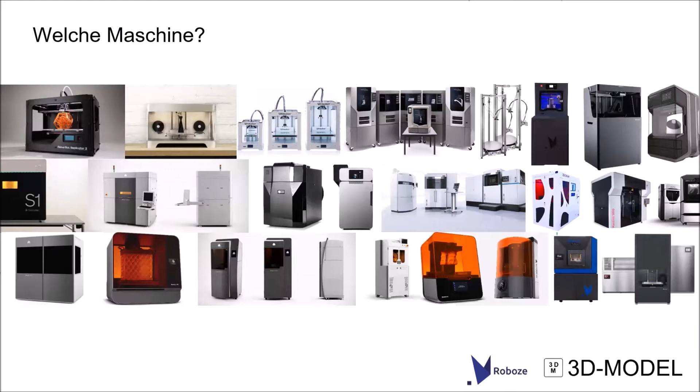Nowadays we have so many printers and printing technologies out there that it makes it very difficult to choose the right printer for me. Not only different technologies, we have a wide range of printers in different price categories, from low price segment to very high price segment.

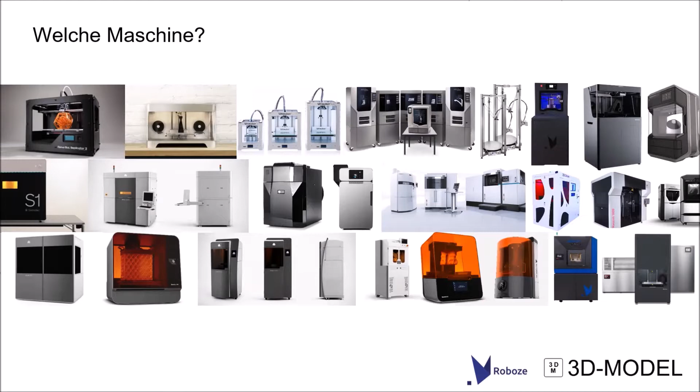Furthermore, we have printers for prototyping and for manufacturing, and to make this more complicated, we have a huge wide range of materials. Not only is there a new 3D printer coming on the market every month or two, we also have new materials coming almost every day for a printer. And as we know, not one 3D printer can print all materials.

So if we go online, if we try to read about which printer is the right one, it gets confusing. And while we're presenting what Roboze can offer you, it's important to see how do I start? How do I look for the right printer for me? What is the correct way to go about it?

Therefore, I would start by asking myself questions. What are my needs? The first question I would propose is: do I need a 3D printer for prototyping or functional prototyping, or is it for manufacturing, or both? In this sense, I have to start defining my application.

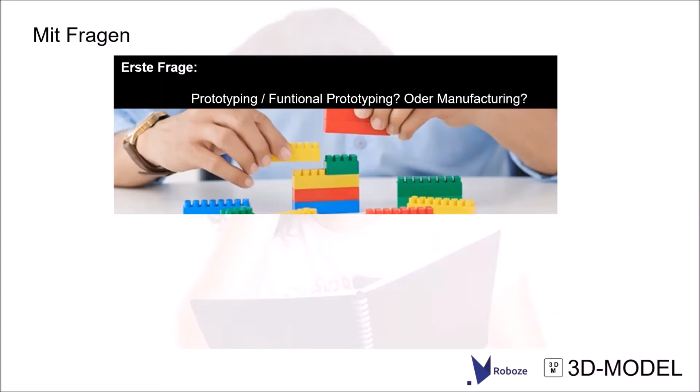Or do I need a printer for manufacturing? I want a printer that I can build parts with, build into the rest of my components, that works for a long time, that holds up — I need strong parts. So it's very important to define which application I'm looking for.

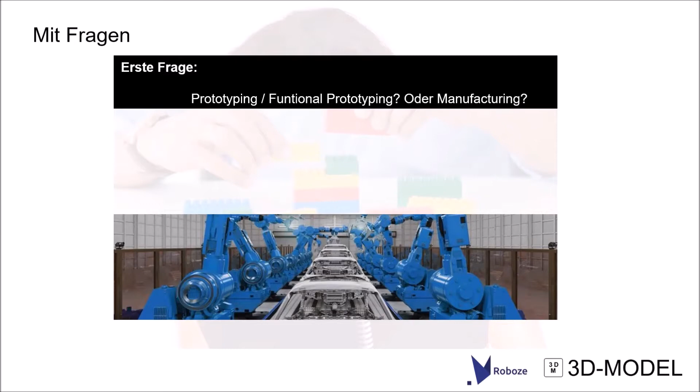The second question is material. As I said, there are many different types of materials, and that alone can get very confusing. Today we have different types of plastic — ABS, PLA, nylon. We have flexible material. We also have metal and many different types of metals, from titanium, cobalt chrome, copper, stainless steel, and furthermore, in the metal area, we also have ceramic.

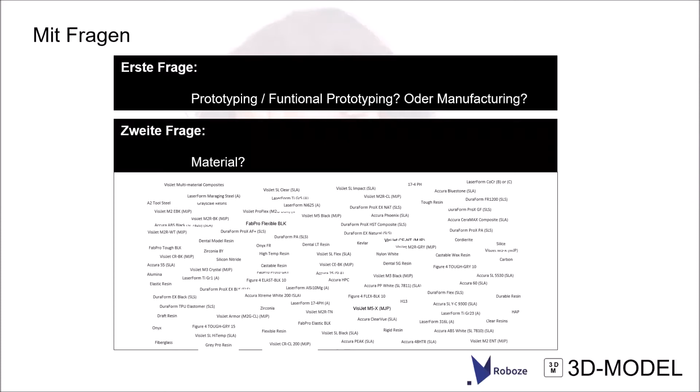So what is the correct material that I need for my application? The third question I would ask is, what build volume do I need? Do I have small parts? Do I have big parts? Or do I have many small parts?

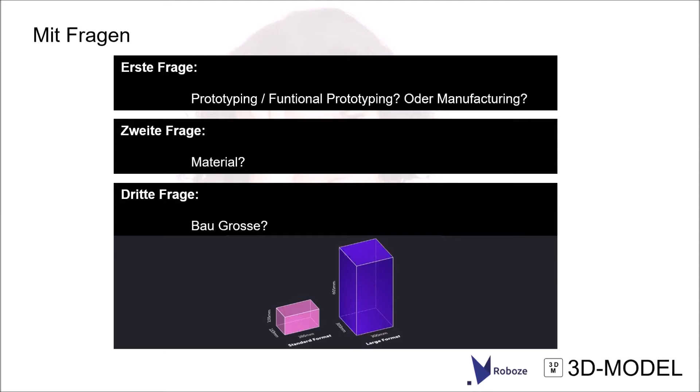Or do I have to do a lot of iterations? If my demands are just small prints with low volume, then a standard format would be enough. But if I have many iterations that I need to print at the same time, then we would go to a large format, or start thinking about building up a print farm. So I would start by asking definitely these three questions.

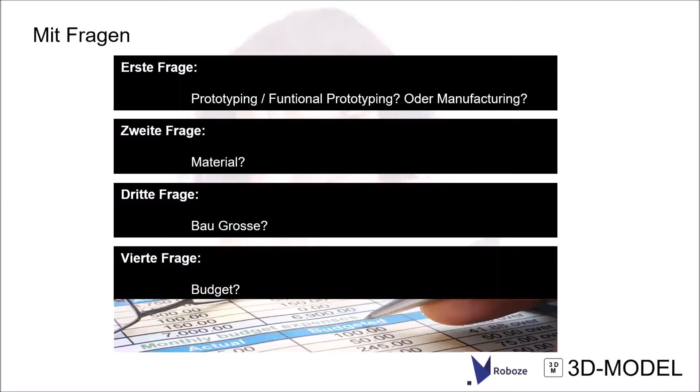And the fourth question is budget. What am I willing to invest? Am I starting off with 3D printing, or am I already an experienced user? This also comes back to the first question, again to prototyping and manufacturing. What am I willing to invest, also depending on my return on investment?

So at 3D-MODEL with our locations in Switzerland, Zurich, and in south of Germany, we have a wide range of manufacturers, printers and technologies that we can offer. Alone in prototyping and functional prototyping, we have, for example, Markforged, 3D Systems, Formlabs, and of course Roboze.

And with this wide range, we have also a wide range of materials. And of course, we definitely have a solution that fits your budget.

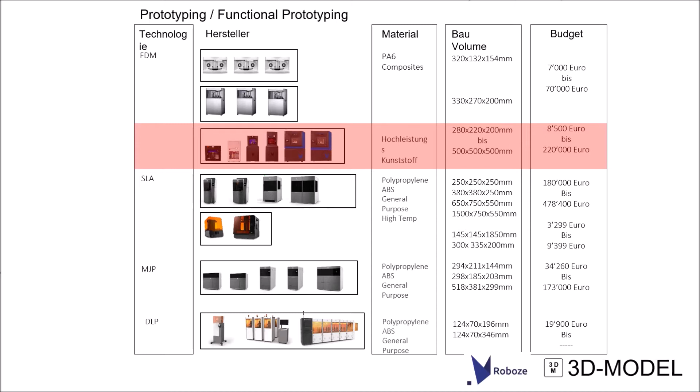And today we're going to talk about what Roboze has to offer. They have high quality, high-end material, plastic, from nylon, carbon nylon, PEEK, and carbon PEEK. So it's very interesting to see what they can offer, as well in the manufacturing, if I need end-use parts, right?

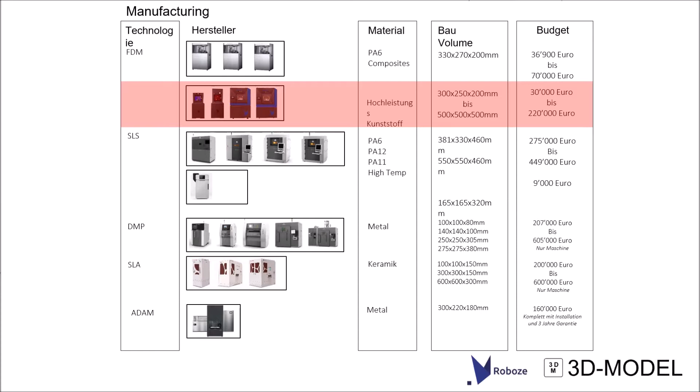It doesn't stop there. We have also solutions here, and I will highlight again the Roboze, right? We don't always need metal. We can nowadays replace, for certain applications, the metal with the high-end plastic that is most of the time easier to work with.

So I'll stop my screen, Graham, when you can stop yours. Yeah, I can hear you, Philipp. Okay, I've picked it up for me to share. So you should now see my screen. Yes, yep, okay, I will start my part of the presentation.

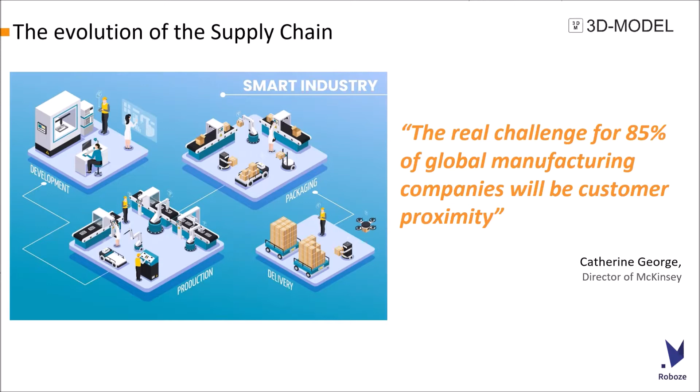So where can we help in the supply chain? We can help in many areas of the supply chain. We can help with the product itself. At Roboze, we have machines which can help you design the product and manufacture the product. That product can give you customization, or we can give you customization of the product. So it's quite unique, or limited to a few numbers of machines or products that we're going to do, up to many products that we can do.

We can integrate the functionalities and make things much more efficient than they've been in the past. And of course, we can respond very, very quickly to the market needs. So as the market changes, having 3D printers allows you to respond to those needs.

Then in the production side, we can do mass customization. So rather than someone making a product and they've got to keep it in production for a long time, or keep the production the same to make it cost effective, we can help by making mass customization and making it easier and a more unique product for your customers.

Then if we look on to the warehouse and the distribution, warehouse costs a great deal of money today, and that warehouse is tied up with stock. We can reduce the lead time so that you don't only have that stock, but you can actually get a product in a more efficient manner than having it stored maybe on site or quite a distance from your site. So we can certainly help with the distribution costs.

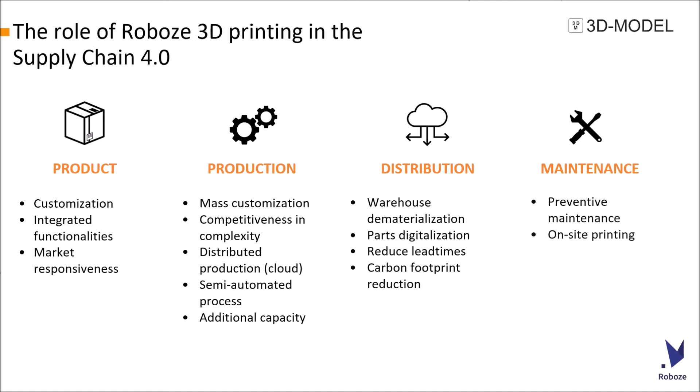And then of course, there's maintenance. If you have a factory and you've got a production line going, you may want to have printers that can produce parts as you need them. So those parts could be used in the production process, or there could be special tools that you use in the production space. This is becoming more and more important if you're in aerospace, automotive, and other large factories where you can respond to the needs that you need locally rather than sending out for something. So it's certainly a big consideration, the maintenance.

We go on to the next slide and we look at the profit with innovation focus. So you can innovate and profit from that innovation. You're not being restricted with what you've already got or what you would like to put into production, but you need large numbers. So innovation is a great thing, and it can certainly keep you ahead of your competition, and keep you at the forefront of your technology.

As we said earlier, mass customization: the market is moving away from the need for one part which is going to last forever. People constantly want to make improvements.

People want to advance their products, and you can do this with mass customization, albeit relatively low numbers of production. But of course, if you scale that over a number of years or months, you're going to get more and more production. This is going to help you, and you get less choice and more customization.

Reduce the cost of the warehouse and the logistics, very important. We're all trying to save fuel these days, trying to save emissions. And of course, if you don't have to transport to a warehouse, then from a warehouse, that saves in these costs as well.

And reduce the time to market. As we said, if you can innovate and make your technology or products a way ahead of the competition, you will have a market lead on them. That's very important, so reduced time to market is becoming less and less. If you look at cars nowadays, they're produced in a relatively short time scale, and that time scale may be updating them on a regular basis, rather than producing a car and having it there for 4 or 5 years because your costs are tied up on it. That is not the way to do it.

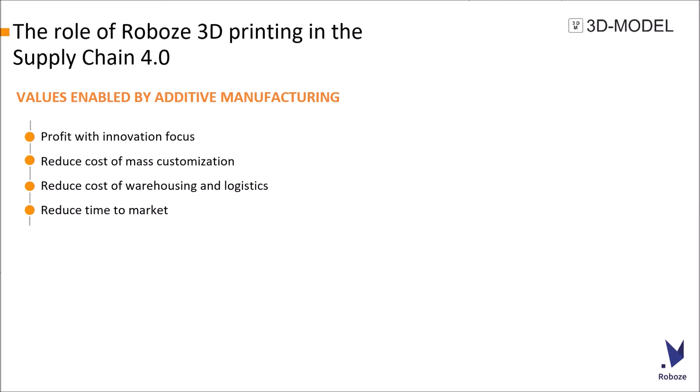If we do a quick comparison between traditional manufacturing and additive manufacturing: traditional manufacturing, which has been around for many years now, is focused on mass production. Long production runs, keep things in production as long as possible, because that's where you're going to make your money. The aesthetics are the same. The economies of scale are geared to make many, many products and not necessarily upgrade those products, or only with limited upgrades.

With additive manufacturing, it's the total opposite. Your speed to market is much, much less. You can innovate and make new products and customize products in a very short space of time. You can also make sure, as we said before, that you're leading the market that you're in. So that helps your company, helps your costs.

Complexity for free. You can make parts very, very complex. Parts that you would normally manufacture in several pieces and put into an assembly, you may be able to print as one piece. And that complexity is there with 3D printers. You can print those complex parts.

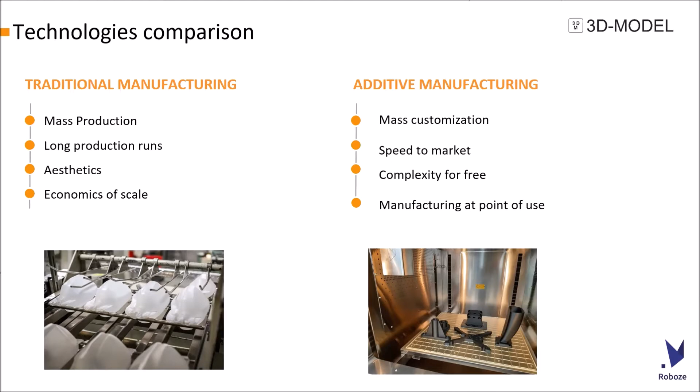That means less stocking of parts, and it also means that you can advance technology very quickly and take advantage of it. And manufacturing, of course, at the point of use. So that saves logistics. If you can manufacture where you need it, rather than bringing in lots of components or parts from different parts of the world, manufacturing at the point of use is another time-saving and cost-saving effect.

So if you're making something that's maybe, say, 250 parts, 500 parts, those parts become very expensive. And as we said earlier, what we're trying to do is drive that down, and with traditional manufacturing, you push that out to tens of thousands of parts to make it cost effective.

3D printing is different. Whether you produce one part, 1,000 parts, or 10,000 parts, your costs are going to be fixed, because your material cost is fixed and your time is fixed. So it's much more flexible in your manufacturing process to have 3D printers, rather than gear yourself up to make many, many parts which are only going to be the same.

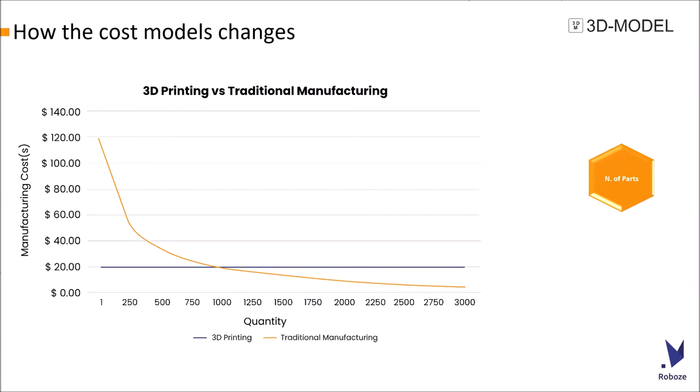Halfway through this cycle of maybe 1,000 or 1,500 parts, if we wanted to incorporate changes, it's very easy to do that with 3D printing. With traditional manufacturing, your costs escalate again, and then you've got to write that off over a long period of time again.

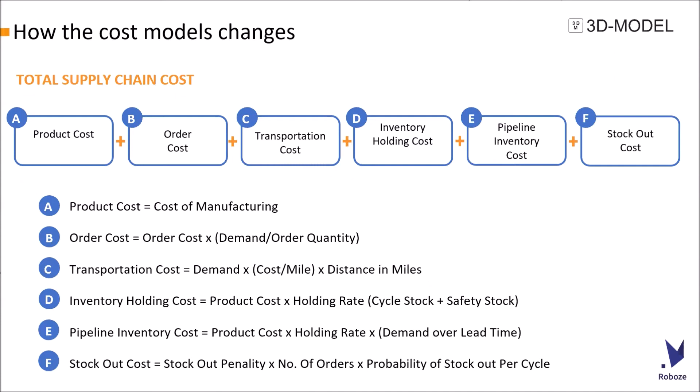On our products, PEEK is a very tough material. It's got a high, strong resistance to high temperatures. It's got a strong resistance to chemicals. So it's used for the product, or it could be used for jigs, tools, fixtures, making the products that you need.

If you look at it on a CNC machine, you could do preparation for 1 hour, 3 hours for production, and it's 3 hours to do it on a printer. So you've saved 25% straight away. If you look at the costs...

Traditional manufacturing takes a block of material and machines that away with a high amount of waste. There is a lot of waste. With printing, you only use the parts that you need. You use the material to print in the areas that you need.

Another saving in cost: setting up a 3D printer is very easy. So the FTE time needed to set up a printer is very, very simple. It's automated. We automatically feed the material into the machine. We automatically set the build plates these days. Everything is very much more automated than it's been in the past. With CNC, they're still doing the same process they have done forever.

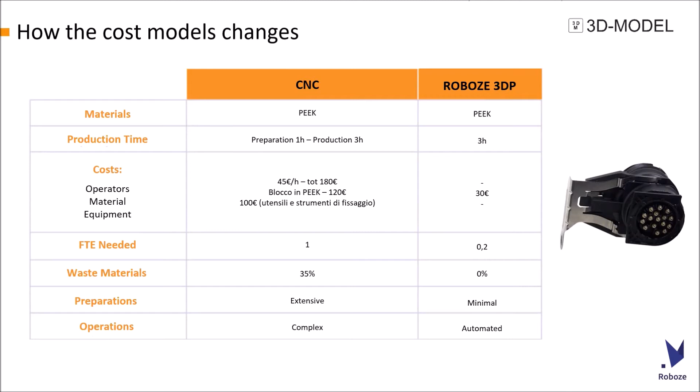And then there's the amount of waste materials. As we said earlier, if you're machining away, subtractive manufacturing, that gives you a high amount of waste. That's not the case with 3D printing. With 3D printing, almost everything is what you need to be printed with. So you can see here, there are big savings to use 3D printers, particularly 3D printers which have materials that are very functional and usable for the applications that you need.

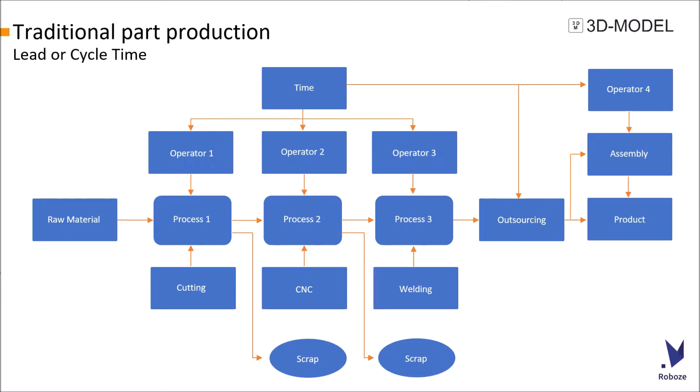This is a typical part in production. If you imagine you have several operators and they're all doing different processes - you could be cutting the parts, cutting material, CNCing them, welding them, bringing things together. Those are manually or skilled jobs in some cases, but they're very, very labor intensive. Even today in manufacturing, with robotics, we're still getting fairly labor intensive in some parts of that process of making something.

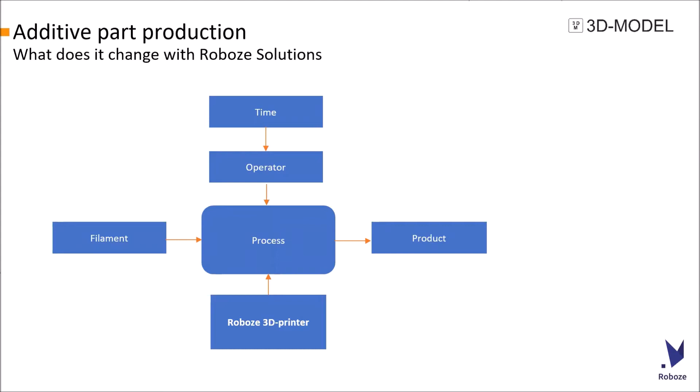It is much easier if you do it with additive manufacturing. You have an operator, you have a filament that goes into the process, you have the 3D printer that's part of the process, and you have a final product. Much, much simpler, much easier, and reduces your costs significantly.

If we look at some of the departments or ways that 3D printing can help - if you have departments, you have cost and time reduction within those departments, you have less outsourcing to do, you have more control over your own supply chain rather than relying on others to deliver components or product to you. You're less dependent on other people's schedule. If someone has an urgent job, your job may slip slightly, then you're waiting for something to come in to help you with production.

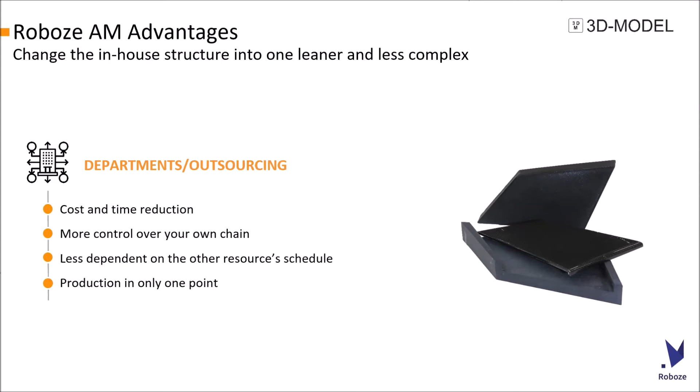And of course, production is only one point. You're doing that on your 3D printer. Because you're using your 3D printer and printing with your 3D printer, you have brought all those into the one location. Time costs money, there is no doubt about it. Time and money go together. If you can reduce the time, you will save money.

There is less chance of human error if it's an automated system. Human error costs time and can be very, very expensive. You can have productivity which continues even when no one is in the office. Your printer can be working away day and night.

You load it up to do the parts that you want to do, and as you load it up to do those parts, you walk away and you leave it. The printers are reliable. They allow you to carry on with your other things that's got to be done. And when it's finished, you go along and pick up the parts that you require.

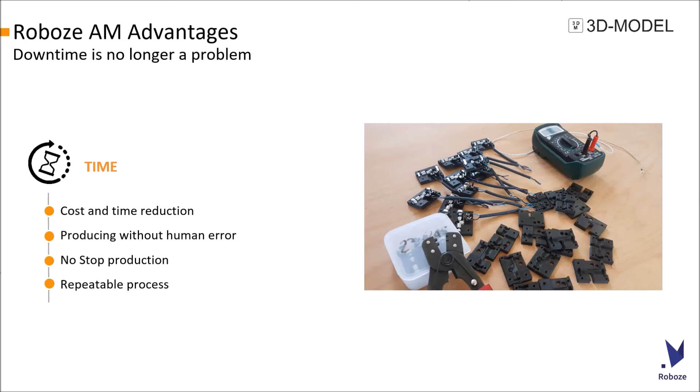It's a repeatable process. If you change the design that you're working with and you're trying to do something slightly different, it's still the same process for the printer. The printer will take the data, produce the part, and you have a part at the end. So if you've modified your design, that's okay, because it makes no big difference to the printer whatsoever.

Waste reduction - in the world, we do waste a lot of material. We waste a lot of material that maybe we should not do so. We are quite a wasteful society, I've got to confess.

But if we can cut down on that material, that is great. Because instead of doing subtractive manufacturing where there can be a high volume of waste, if you do additive, you're only using the material you really need. So that can be significant. I have seen parts where 80% was waste because it was a relatively small or thin part that was needed, meaning 80% of what they were machining went straight into the bin or had to be recycled, which also costs money.

Parts can be lighter. With some of the technologies and materials we have today, we can produce parts which are as strong as metal. Phil referred to this in his earlier presentation, and it's very true. You have parts which are lighter, which means that if it's fitted to some transport system, whether automotive or aerospace, it reduces the weight of that vehicle or aircraft. That saves emissions, and that helps save the environment.

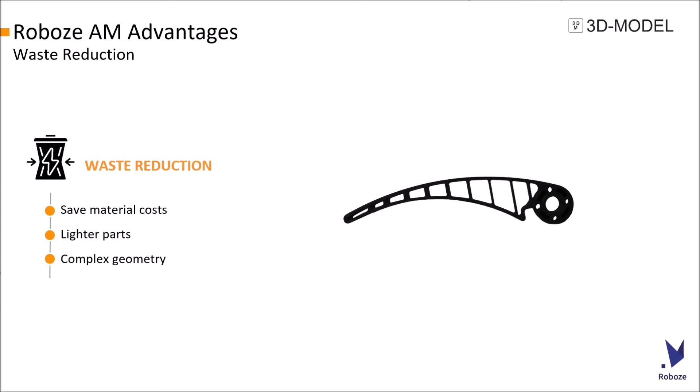This saves a lot of time in your manufacturing process, and this is not an exceptional case - it can be fairly standard, reducing time and effort by making parts into a single piece as opposed to something that needs to be assembled. This does mean you need to look at 3D printing slightly differently than you've done in the past, but we're all there to help you get that and make the efficiencies in what you're trying to do.

Human resource optimization: you can have a lean number of people, a production chain which is much leaner and needs fewer people in it. This leads to a reduction in the human resources you need. That doesn't mean everyone has gone - it means people could be doing something different than standing next to a machine.

3D printing is reliable enough and doesn't need adjustment in the process. You start the printer, you come back at the end. You don't have to keep an eye on what's happening within the printer or watch it and make adjustments as you go. Basically, you load up the job, you start it, you leave it, and meantime you can be doing other things - modifying designs, preparing for the next jobs, scheduling. There's so much more that can be done rather than watching a machine.

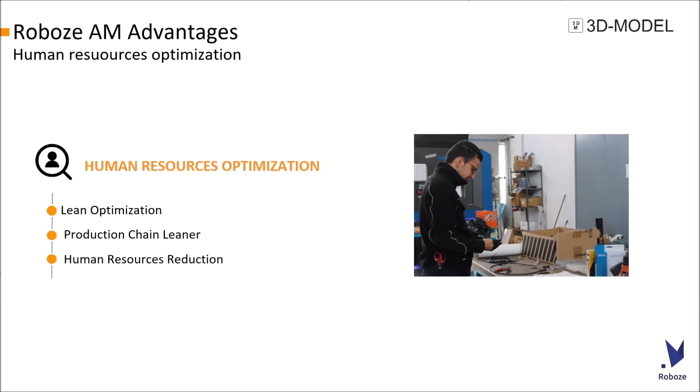Then assembly - you're eliminating the complexity, making it easy to assemble. We have parts which can be used very effectively in part holding to make this assembly accurate. If you imagine having some metal parts that had to be joined together accurately, or with a bit of heat involved to make sure the parts bond, we can provide materials that allow you to do that. This helps in the accuracy of your assembly, and in customizing tools which fit exactly what you need. You don't always have to use standard products - you can use products that are very customized to your needs, and that's very important. That gives you control and the ability to make things unique for yourself rather than buying something off the shelf.

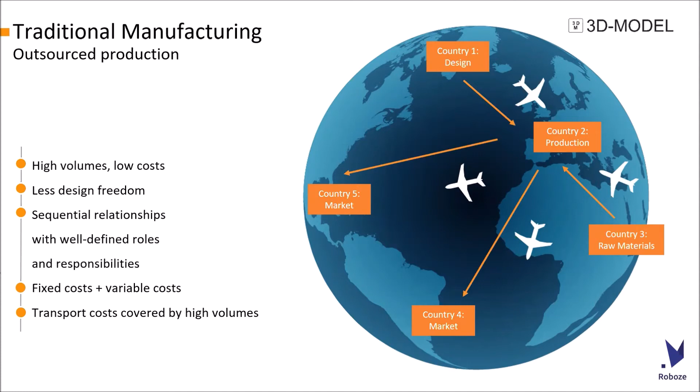With traditional manufacturing, as we know, we are shipping things all over the world. Many countries are involved, providing parts of the components we need - high volumes, low cost, this is what we go back to. So they're shipping it all over the place, and it's not always the most cost-effective way to do it. Transport costs are high and keep rising, and we need to think a bit more about how we do this. If something happens and you're waiting for components from across the world and something goes wrong with just one of those components, you're going to hold back your production. If you cannot get output, you cannot invoice, you cannot get the assembly going. So we very much need to try and reduce some of this travel, not just for ourselves, but for the emissions as well, for the world - let's try and make the world a healthier place to be, should I say.

With additive manufacturing, the design could be produced in one country. The design is easy to transport to another country because, for example, in Germany, if you are making some design for cars, aerospace, machinery, whatever, those data files, those software, the CAD software, the files from there can very easily be sent to another part of the country or another country. It's very, very easy to do that.

We have the cloud and we send it via cloud nowadays or some other method. So we're not using transport systems, we're using the internet system to do that.

The raw materials could come from another country as well, and we send in raw materials. Those raw materials could be filaments, and those are fairly easy to ship, very easy to ship to be honest. You could ship those in, all coming into one to make the product.

And it doesn't matter whether it's across a country or whether it's within a single country. Both can be much more efficient than what we're used to in the past. The costs are fixed and it's easier for us to keep control of the customer and the manufacturer. It's much, much easier to do that than it coming from many, many different sources across the world.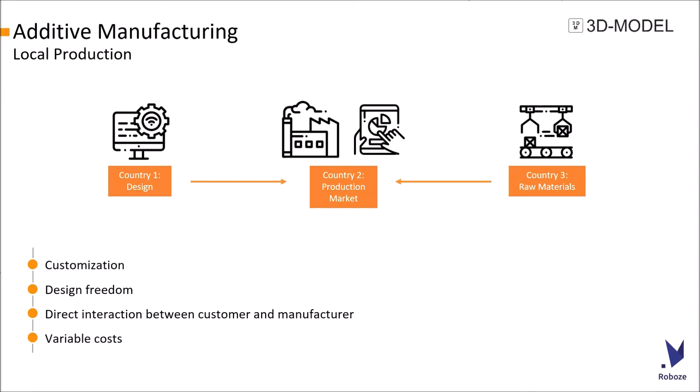Here's a typical case study. The Iveco trucks, a customer that we have down in Italy, in our home country, that you see on the right-hand side, there's a sliding stopper made in PEEK. PEEK is a strong enough material that can be used as a produced part. It can be used in situ in this truck. So when the door slides, that is a stopper there for the door.

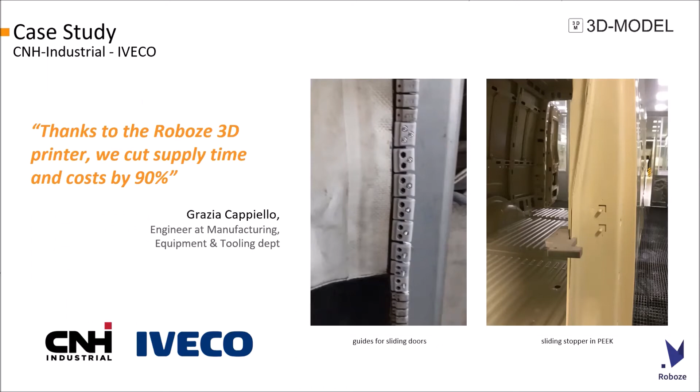This has saved them a time of about 90% in supply time and costs, a significant difference with just one single part. After they did this, they then looked at other parts of where they could save money and where they could save time with the production, and that increased everything a great deal. It doesn't mean we're producing the whole vehicle, but we're contributing to make the vehicle in a very significant way. And all those little times that we save with components all build up, of course, and make it much, much more efficient.

A PEEK valve for an oil and gas sector. This is a valve that's used within the oil and gas sector. Sorry about the phone, just give me 1 second.

Apologise for that, I've just disconnected it.

So this is a component that's needed, fairly common in the oil and gas sectors. There is a lot of waste and a lot of money in the oil and gas sector. You know, if you stop production, whether it be in a car factory or whether it be in oil and gas, it costs you an awful lot of money.

The time to produce this part was about 4 hours. And as I said, we have materials that can be used to make parts which have excellent chemical resistance. This is what they required. This would be a specialist part. And this part, if they had to wait for someone to manufacture it, it would cost a lot in time.

They've got to wait for it to come in-house. Equally, if they have a warehouse full of those and many, many parts in stock, it's costing them money. We could produce this part in a few hours, and this is a real functional part that they can use in the day-to-day life of producing oil and gas.

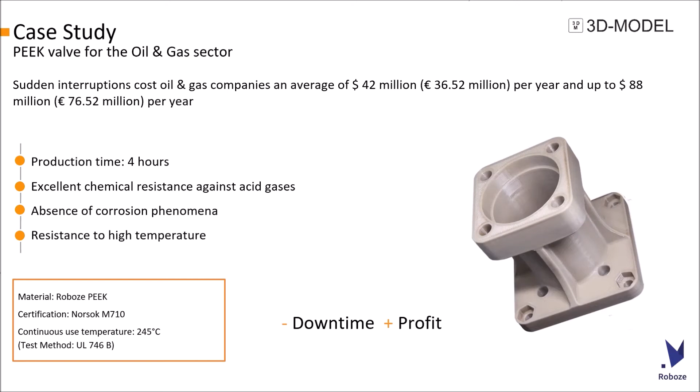Warehouses - we drive down the motorways these days, or the Autobahn, and there are many warehouses, not just holding final product, but also holding parts for people. These warehouses cost a lot of money, and also it's stock - this stock costs a lot of money. It ties up your cash.

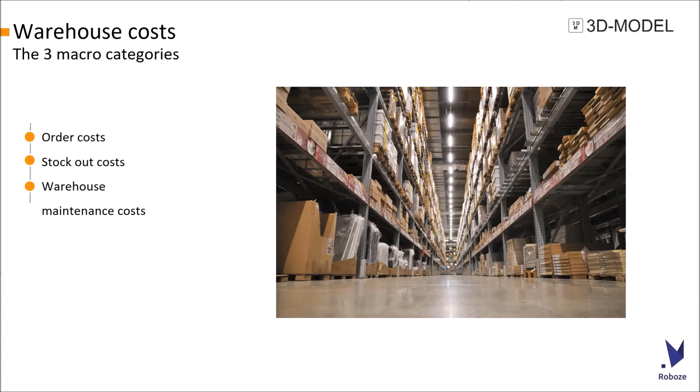Why not print it when you need it rather than having a warehouse full of parts? You still have the same problem with a warehouse in that you may be hundreds of kilometers from that warehouse and they've got to transport it to you. Why not have a printer close to where it's needed and print the part as you need it? Or if you have routine or scheduled maintenance, print those parts before you start, and those can be in your office right next to where they're required.

Warehouse costs, we've already touched a little bit on: capital costs, storage costs, service costs, risk costs. If you have a warehouse full of components, you're very reluctant to change your design because you're going to have to write that cost off, or part of it. You don't want to change a design and then have to get rid of components sitting there as dead stock. Basically, the warehouse is going to cost you a lot of money.

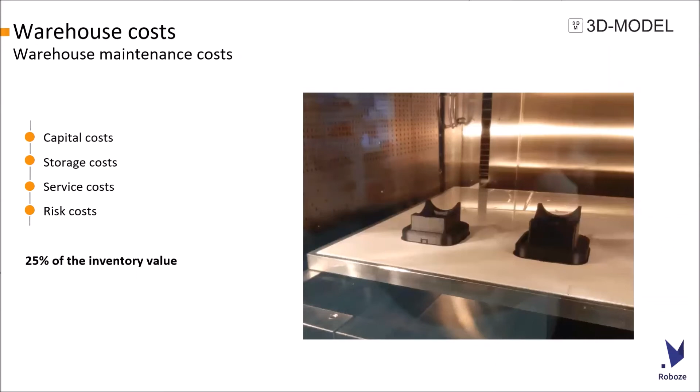If we look at this slide, we see there's a physical warehouse for mass production. As we said earlier, we're producing many components and then stocking them. With just-in-time manufacturing, it's a similar process - you're trying to get them into the car factory just in time, but there is still a large stock because you cannot afford for that to go down, or to not be supplying your customers. Stocks always exceed your needs because you need a buffer. This obviously increases delivery times as well.

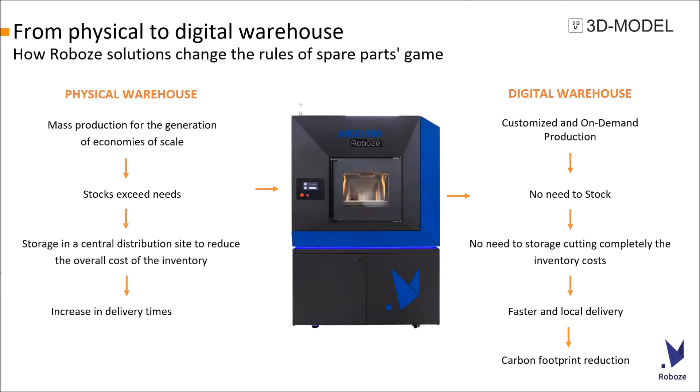With a digital warehouse, you have all the data online, available for you when you need it. So you're not overproducing parts, and you're taking stock only from when you need the parts. This becomes much more cost effective and more reliable than in the past. You don't have the big inventory costs you've had before. And of course, you're delivering the parts right to where you need them, which is at your office. And as we keep talking about, it does reduce your carbon footprint - a good thing going forward, as we all try to save and reduce it.

If we look here at how to optimize warehouse costs: you have a spare parts catalogue or product catalogue, and you can decide which parts move slowly and which move quickly. Here's a part you very seldom need - you do not want to stock that part, you want to produce it as you need it. Even for a slow or very slow component, don't tie up many of them on the shelf costing money to stock. Have those components produced as you need them.

We don't do everything this way - there are some parts needed constantly, maybe on an hourly or daily basis, and yes, those can still be done with traditional manufacturing. The whole idea is to have the parts when you need them, as you need them, and save on the long drawn out way of producing and stocking parts.

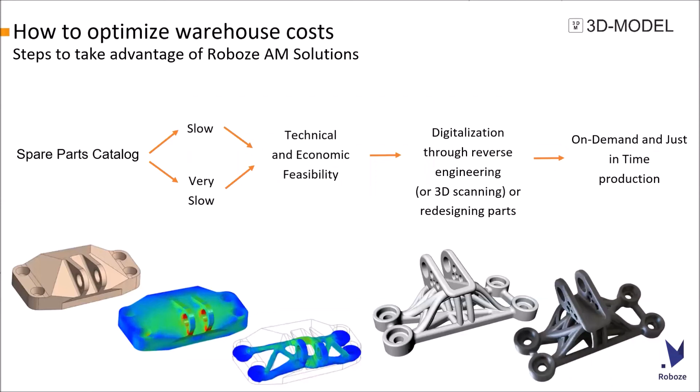So what can Roboze do to help you with your 3D printing? We have a wide range of materials, a wide range of machines, and a service called 3D Parts, which is like an on-demand, just-in-time production site. This is done with a network of companies we deal with across the world. Basically, it's another way to get into 3D printing to prove it's right for you - close to where you are, closer than shipping across the world, giving you a taste of what can be done.

Our printers themselves, as you've seen on Phil's chart, range from low-cost printers right up to full production printers - desktop printers to production range. So we have a wide range of printers that we can help analyze what you need. That's part of Phil's job, my job - all of our job is to analyze what you need so we get the right solution for you.

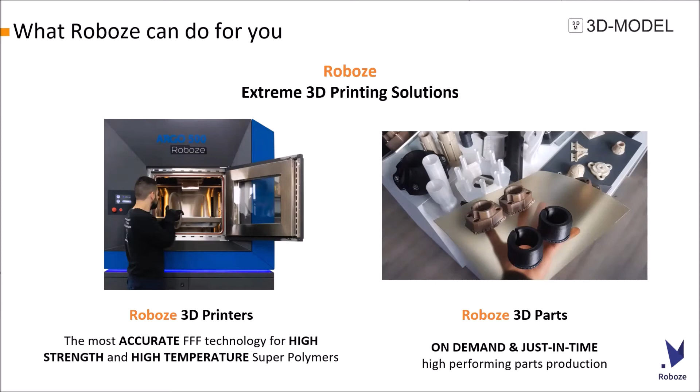Looking quickly at Roboze 3D printers: faster production than traditional methods, you get it on demand, when you need it. One-step production - there isn't a number of people or operators producing the parts, you can have one person operate the machine and control it. Reduction of material costs - you're saving material, not making stock, and not doing subtractive manufacturing with a high amount of waste, so your reduction in material costs is significant.

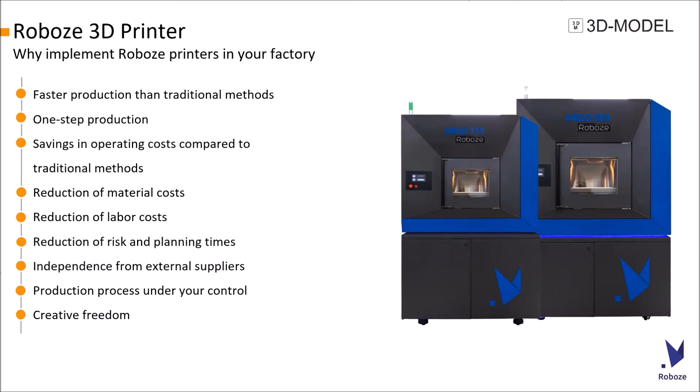Reduction in labor costs, reduction in risk and planning times - you get the components and parts when you need them, you're not relying on someone else, you have control. Your dependence on external suppliers is reduced, since you do this in-house. And of course, creative freedom - freedom to make parts as you need them, freedom to modify, update and enhance your products and technology as you go forward. So very much we are giving you something that makes sure 3D printers are an ideal fit for you.

3D parts is a flexible manufacturing system of high performance parts. We use materials which are high performing - it's what Roboze is known for. They're known for producing parts or materials which are very unique and strong, whether that be for high temperature applications, high strength applications, or high chemical resistant applications - we have them all. Roboze 3D parts can give you a flavor into that. You can use them to buy some of those parts, to try and test them for yourself, and then work up to a reasonable sense of what you need for your production.

Do you need a large machine, small machine, big platform, small platform? You can find all that out by using us to produce some parts. That is not a problem.

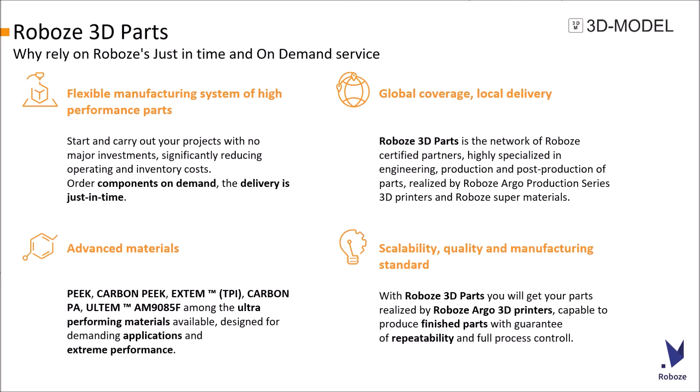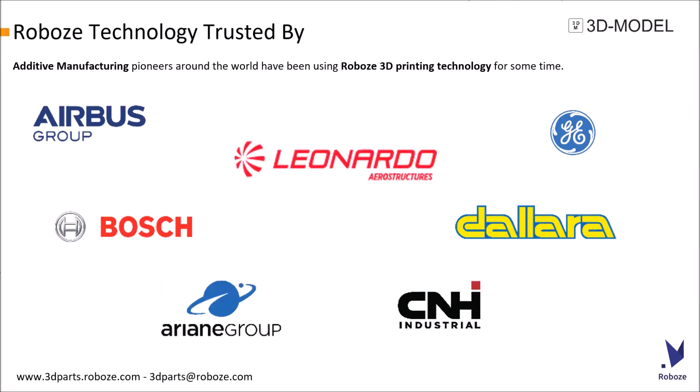Some of the customers we have already sold machines to and are using our machines - this is just a small amount of the people that we have. There are many well-known customers from across the world that we deal with. For each well-known customer, there are many unknown customers who supply those companies as well. Airbus doesn't do everything - Airbus uses many suppliers to print parts for them. We have the companies that provide the parts to Airbus.

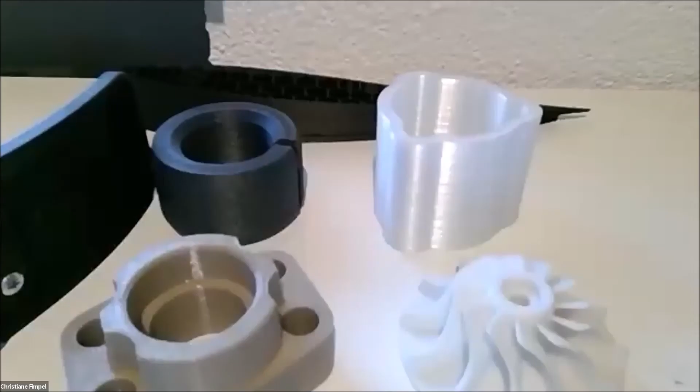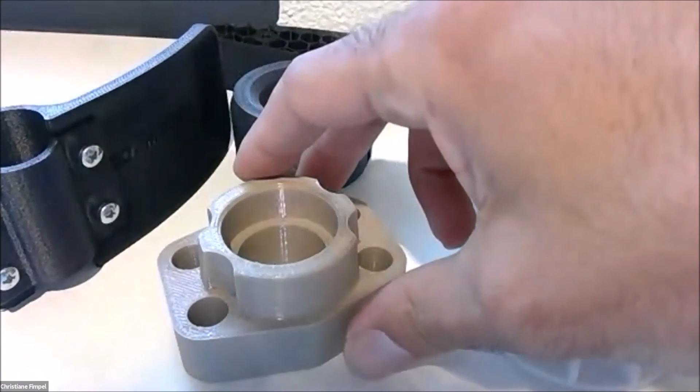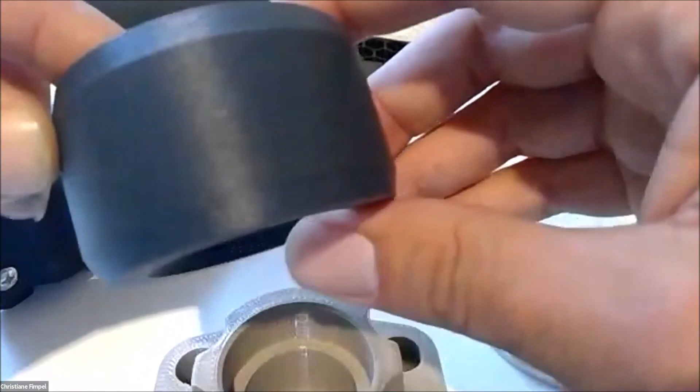This is now a part, also a valve, that is printed in PEEK material. What is also interesting from the Roboze side is they not only have pure PEEK as we've seen here, but also a carbon PEEK material. It's a very, very strong material - I would say as strong as metal. Even if I try to close the gap here, it's very tough, I can hardly budge it.

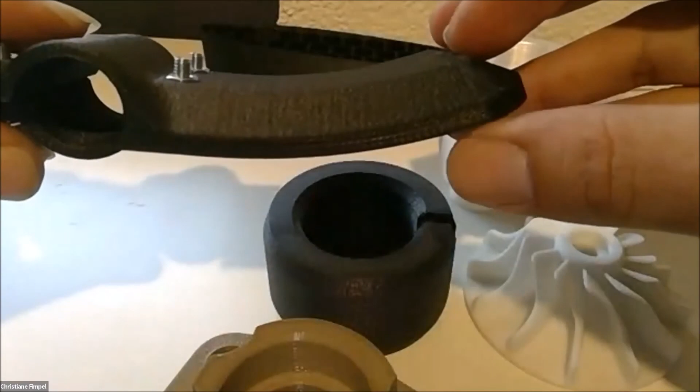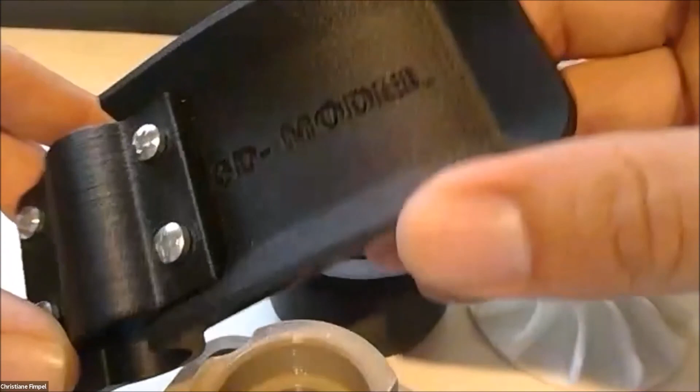3D Model, we've also been doing our part for COVID-19. We've been developing handles for doors so you don't have to use your hands - you can just use your elbow. This is clamped onto the door, and this is a carbon PA material.

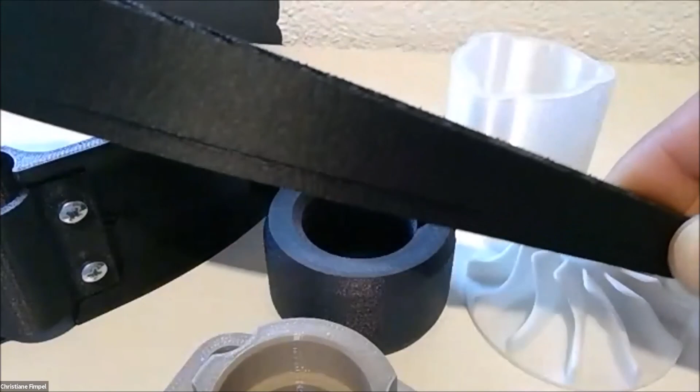And the last part that I also want to show is also for the automotive industry - maybe I have to put this a little bit further away. For e-racing, these are combination parts to attach the wings.

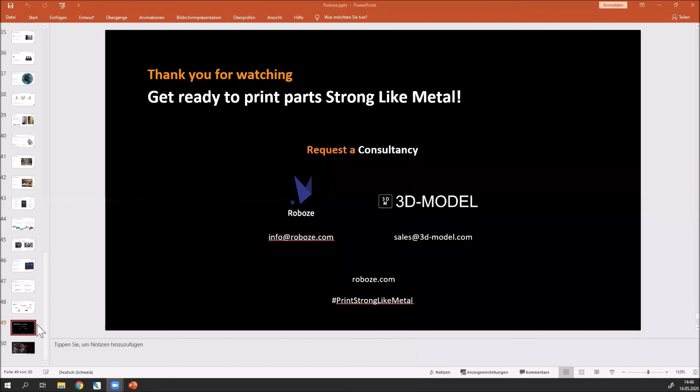I do see a question about what are all the different materials that Roboze offers - just chime in, Graham, if I leave something out. As said, we have PEEK, we have carbon PEEK, we have carbon PA, we also have a functional nylon, as well as standard plastics like PLA, ABS, and we also have a PP material. I think that covers most of them, Phil. In total we have about 12 to 14 different materials depending on the machine that you're going to use.

We do have a new one which is actually exclusive to us for 3D printing, X-Steam. X-Steam is a very popular material in the aerospace industry, and we have done a partnership with Solvay, who manufacture it, and we have an exclusive on that for the next few years coming. Obviously they're supplying into the aerospace industry already in a subtractive form, and we are the first ones to use this in a printed form for them. So yes, we do have a wide range of materials, and I think Phil has covered most of them - there's glass PA as well, and a few other ones, there's a flex material, a TPU material as well. So yes, we do have a broad range of materials.